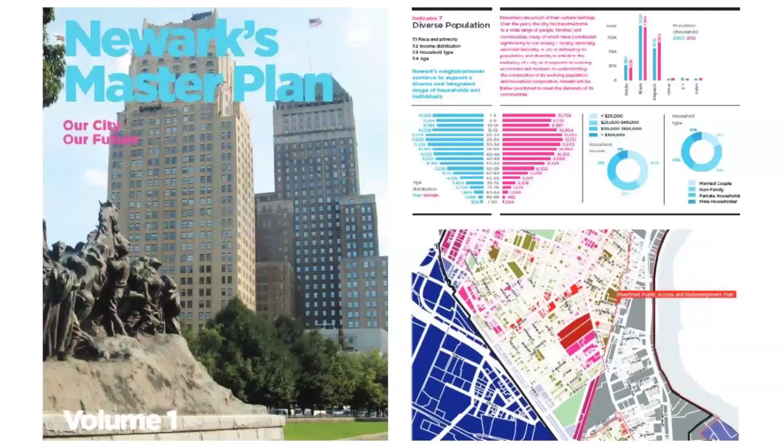So I met my wife in Saratoga. She ended up moving down to the city, my girlfriend, and I followed her there. I went back to get my master's, focusing on sustainability, specifically architecture and urban design. We worked with the city of Newark - this was one of the projects we worked on in our architecture studio. This is 2011, 2012, I was really focused. I wanted to make a contribution, take a meaningful look at things - I have an urban planning background, I like urban design.

And what occurred while I was at grad school was something I think everyone here is familiar with: Hurricane Irene hit the city of Hoboken, where I was living. We had 6 inches of rainfall - it was catastrophic. Then the next year was Superstorm Sandy, which was a different type of storm event. Storm surge is different than rainfall, and that recalibrated the entire community's understanding of what we were up against.

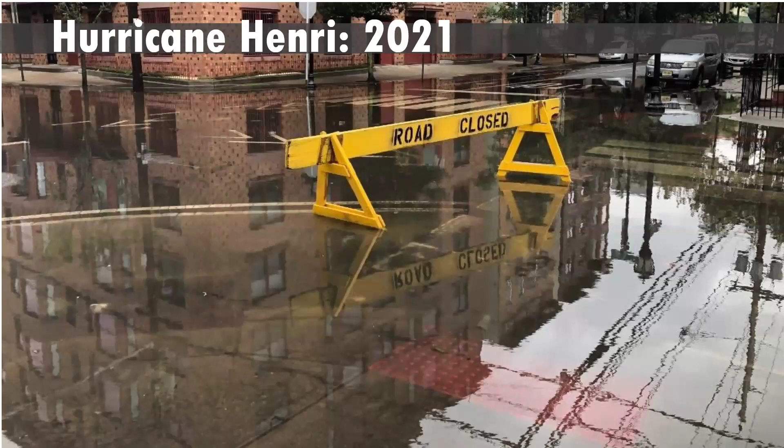I know that there was a lot of flooding in Vermont last year, and a lot of impacted communities. So from 2011 to 2023, we're going from constant flooding, severe flooding, hundreds of millions of dollars in damage, thousands of businesses and residents impacted, to basically flooding limited to a single tide cycle duration.

So the statistic that I want to leave you with is our projects will be done in 2027. Right now, we can address 90% of rainfall events through the practices we're going to go through. By 2027, we'll be able to address 90% of coastal flood risk in the community just through the interventions and policies we've developed.

I thought it was really important—this has got to be slide 16 or 17 here—to actually put this in the context of Vermont and some of the difficult conversations that we went through.

The point of this slide is it's a calibrated question. We do not all share the same sense of reality, as much as I'd like to think that we do. There are differences of political opinion, you name it.

And so the question is: is the risk real? This is a conversation we had with our community. We use facts and data to kind of investigate that issue. So this is a list of disaster declarations from 2011 to 2021, and the federal assistance that the state of Vermont received during that same period.

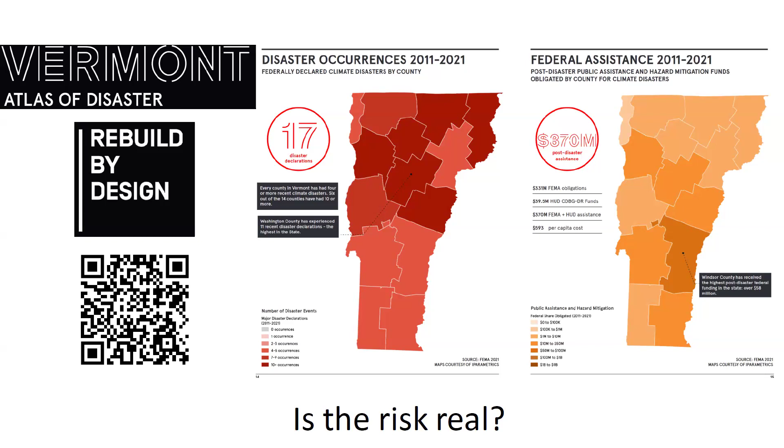I think there are very, very specific questions that we need to ask as it relates to, is the risk real? A study by the University of Vermont predicts $5.29 billion in flood damages along the Winooski River in the next century, affecting over 140,000 Vermonters.

This is from Tropical Storm Irene—like, how long's our memory? Did this happen? These aren't all necessarily questions that get a positive yes. And when we walked through this, like you saw the pictures I started with—did this happen? Do we agree there's flood risk? Those are all kind of things that are complicated. It seems like it might be simple answers, but it's difficult.

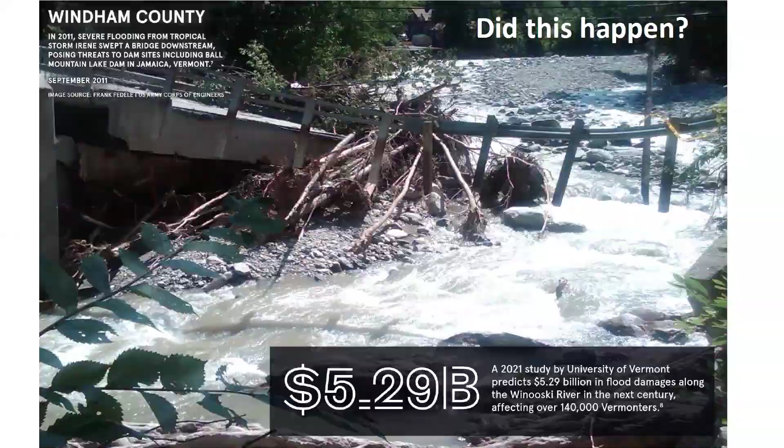I think this question has to do with probability, recurrence, frequency. It has to do with what is your mental model of the likelihood of something severe happening again within the community. And is that such an important question to answer that we should do nothing? So when we spoke to our community, that was a question that came up pretty often, actually, and the answer to that was usually no.

No, we don't want you to do nothing. We think you should do something. And I think that by giving the community the agency to say no, that's kind of direction—though not simple direction. There's always a no-action alternative when you're comparing projects against something. But it gets a little sticky when we answer the question, should we do something? That gets into the who, what, where, when, why, and it gets into site-based solutions.

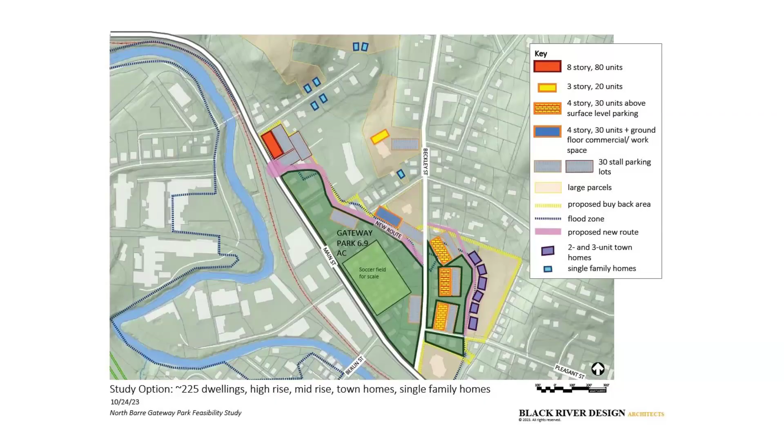At this point in time, this is 2015, there was a petition from the community after we received federal monies, not Hoboken taxpayer dollars, to stop the project. This is a little bit in the weeds, but it said: say no to option A, stop Hoboken from building a wall that doesn't protect all residents.

What this doesn't say is that the reason this petition was started is because we were building on a residential street called Garden Street. And the reason they didn't want us to move forward with the project is because they didn't want us to build in a residential area.

There are only three places you can build flood risk interventions: in the water, on the waterfront, and inland. In the water and on the waterfront were too expensive for our project budget and too impactful. So when we moved inland, that lowered the design elevation and the height, and also meant we had a financeable project, but a small group of people didn't want to see it.

So 742 people signed a petition calling for Mayor Zimmer's job, my job, and the head of our Office of Flood Hazard Risk Reduction Measures—it's our DEP, I think you guys have DEC here. It gets kind of complicated.

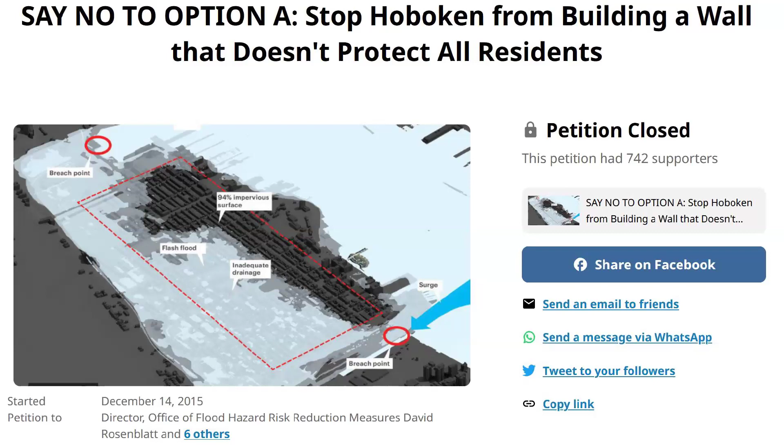So with that in mind, going into the next part of this—we prioritize and execute on a comprehensive plan that includes our capital plan. We worked with our state I-Bank partner to leverage the federal funds we received. But I think it's important that we start from the beginning of where we were, so you can see where we are now.

1868, this is Hoboken. It's this little marshy, wharfy nothing on the west bank of the Hudson River. This is a defining geologic feature, it's the Palisades. Manhattan is obviously across the river, built out. But the pre-existing hydrology of Hoboken was not good. And then they just decided to fill it, and they were like, we'll see if it works out. And it kind of did.

So we have contaminated soils, low built waterfront, like wood piers. I'm not talking about highly designed, heavily engineered. I'm talking about a working waterfront. So over that 100-year span, you have rapid industrialization. From 1955 now to, this is like 2020 or something like that. Let's just call it another 50 years.

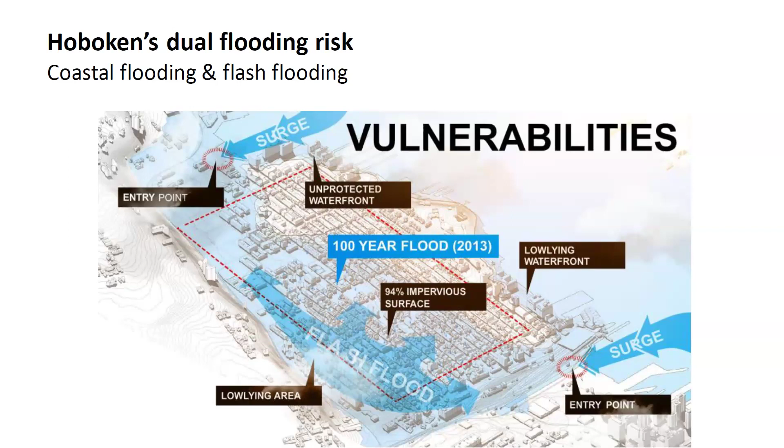There is another area on the west side of the city that's vulnerable to flash flooding from rainfall events. So at a very high level, we began to categorize vulnerabilities and our risk profiles associated with not just hurricanes, but tropical storms, extratropical events, nor'easters. And when you overlay that on our municipal grid, more than 75% of the city of Hoboken is in the coastal floodplain, which is problematic for a number of different reasons, and it generates a whole different risk profile than what may be in the Winooski Valley.

But what we also have is rainfall flooding hotspots on the west side in darker blue. And those 2 different risk profiles generate a great deal of liability. So I'm not sure if everyone can read, but our tax base is roughly $12 billion. The National Flood Insurance Program insures $2 billion. The floodplain is about 3/4 of the city, so let's call it $8 billion of ratables, which means there's a delta of $6 billion from exposure risk versus the actual protection.

So we pay $8 million a year. So that's money just going out of our pocket to the federal government for nothing other than insurance. But insurance caps at $250,000, and a lot of these properties are worth 4, 5, 6 times that. And so you have a big delta now, and then when they issue new flood maps and the risk rating changes in FEMA, we're going to have an escalation that we think annually is going to be somewhere between $500,000 and $1.5 million. But we already know that the first escalation for the new policies is going to be up $1.3 million just in our risk profile.

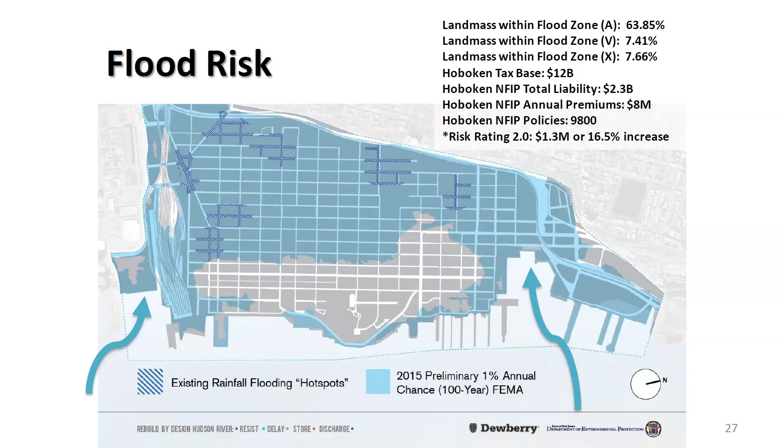So why is this important? We're starting to create a financial case for investing in infrastructure that reduces risk and prevents hardship versus paying for insurance that doesn't modify risk and doesn't necessarily address future development or the health of the community. And so we developed a comprehensive water management plan.

Rebuild by Design was the group that produced those Vermont slides. There's a QR code in there. They produced something called an Atlas of Disaster. They do it for every single state. The statistic that stuck out for me is that Vermont had the 5th most disaster declarations, I think it was last year, behind Florida, California, New York, and New Jersey, or something like that.

So if you look at population versus geography, I think that the state of Vermont needs to think critically about disaster recovery, and the cities themselves need to start thinking, similar to what we had to do, what does the future look like for the next 10 or 20 years? And for us, it was both financing and a capital plan that built out these strategies.

Resist being physical flood walls and interventions that prevent storm surge from entering the community. Delay, store, discharge. Delay being keeping water out of our stormwater management systems. Store, building underground systems that connect to our wastewater management and our stormwater management features, and then discharge being active pumping. So when you have high intensity, high volume, you're using pumps to move water within the watershed away from vulnerable areas.

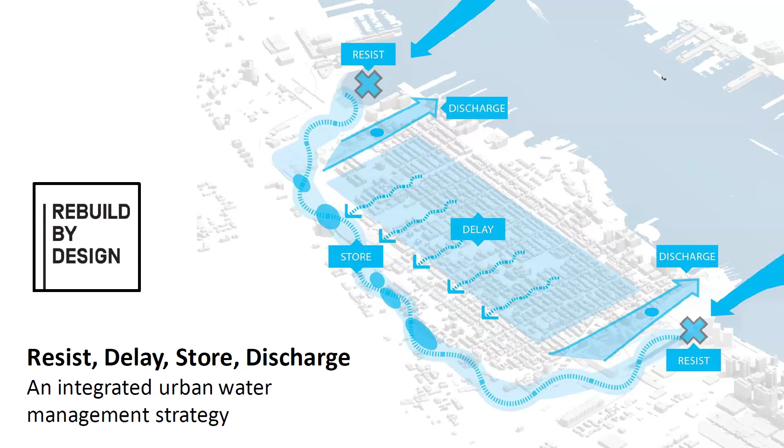I was talking to Michael on the way here. There's a difference between capital planning and what you're looking at, which is part of our documentation for compliance with NEPA, the National Environmental Policy Act. But it basically says in the eyes of the federal government, this project has met historic, environmental, cultural, and offsite impact reviews. It was a 2-year planning process. It cost like $8 million to do. And we were able to put into practice where those sites were, what we needed to do.

So the red area, south side of the city, that's storm sewer modification. That's heavy construction. Same at the north end, so that if water comes up over the edge, it can drain back to the Hudson River. On the west side, the 3 purple areas and lines are where we're completely rebuilding our stormwater management system and redirecting it towards park sites with pumps.

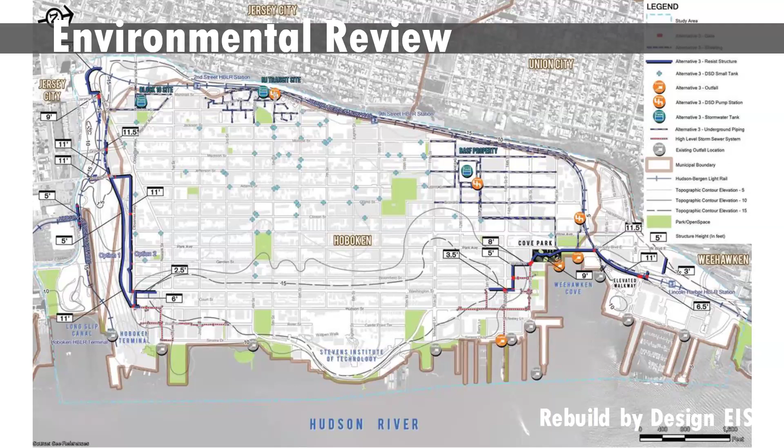By having an environmental review as well as hydraulic risk analysis, we were able to back into a benefit cost analysis that said for every $1 that we're spending, we're reducing risk by $4. So if you start thinking about the expenses that we've had versus the exposure to risk that we have, we're making a financial calculation to the federal government, to the state actors that says, not only does this make sense, it's the best return on your investment you can do in investing in infrastructure.

When we set out to redesign basically the community, we knew that we could not do it through single purpose and single utility infrastructure. If we spent hundreds of millions of dollars on catch basins and pipes and concrete curbs and all kinds of systems that have been proven but don't produce any blue sky value, we would have failed at our job. We were very, very cognizant that form had to meet function.

And the elegant solution is something that you don't necessarily know. That when you're standing on a Resiliency Park and you're playing soccer with your kids, you have a $30 million, 1 million gallon storage tank below your feet. And so we were very cognizant of what that might look like for the community. And these are just examples. We called it a toolkit. We called it an amenity toolkit.

I'll say this now before I show you the next slide: the community was very concerned that we were building walls, that we were gonna separate them from neighborhoods. And the feedback that we got that was very specific was, do not build in front of us, do not build behind me, do not build next to me, do not build in my neighborhood, but don't leave us out from protection.

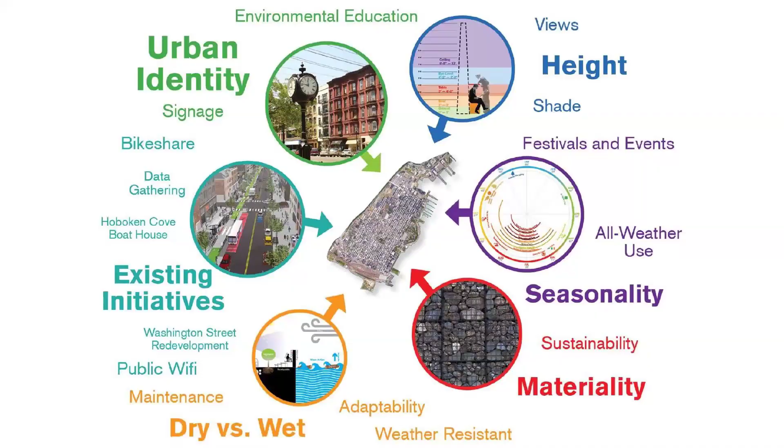So what that produced for us is park spaces that are elevated above grade. Harborside Park's about 4 acres. It's under construction right now, so I don't have great pretty pictures of it. But in the middle of this, there is a 12-foot high T-wall that has concrete footers, bulkhead down to bedrock, sheet piling. It's a seriously engineered feature. But the way it presents itself to the community is through open space and access to the waterfront.

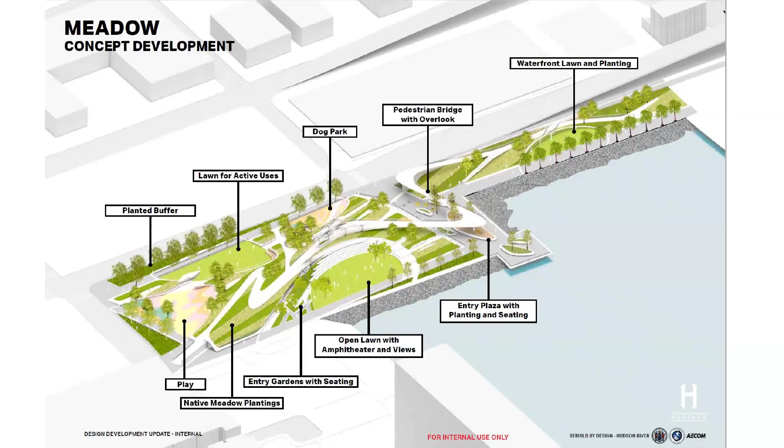In the area right here, there's a gate that comes across, as well as down here, there's a gate that goes across the street. And so by pushing the alignment back a little further from the waterway, we preserved access. We preserved view sheds, which were very, very important to the community, but we were also able to reduce the alignment height. So if you're on the waterfront, you're building at 20 feet above grade, 25 feet above grade. If you move it back, we're at like 12 feet above grade. And that was all confirmed from a hydraulic model that we did to look up and downstream from our community.

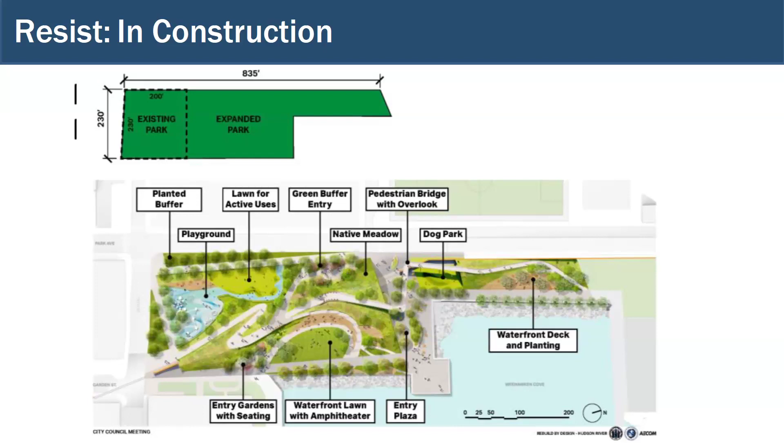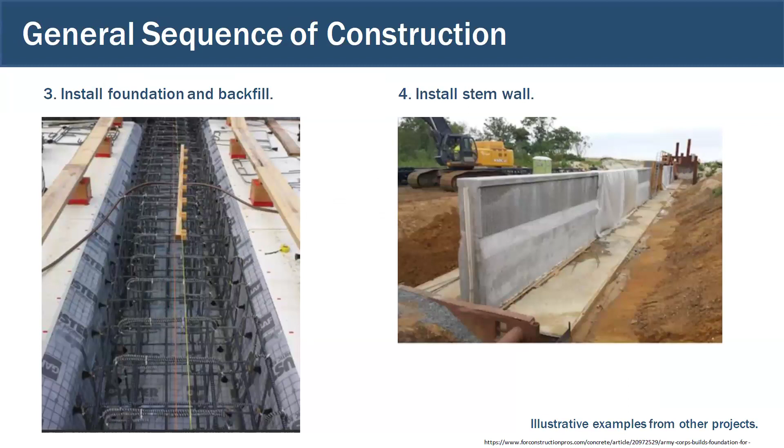So this is kind of what in process looks like. Under that park space, you've got a concrete footer, concrete wall, but then we produce an amenity treatment. I get some criticism for this, people are shitting on the orange color. I like it. It's safety orange. It's the color of the Netherlands. It's the state flag from New Jersey. No one can agree on color. So if that's where we're at, okay, we'll change the color.

But the idea is you can use metal, you can use wood, you can use texture. There's planting. These rolling gates are going to cross streets if there's a coastal storm surge event, but the majority of the time it's just there. And this is more of an active program. You can have passive features that work just because they're there. So what I'm trying to give you an idea of is if the community wants to adapt to flood risk, there are ways to do so without necessarily changing the character of the community, which was really important. I think that I went too far on this one. I've got a lot of feedback, but the idea is that you can make it something that looks beautiful.

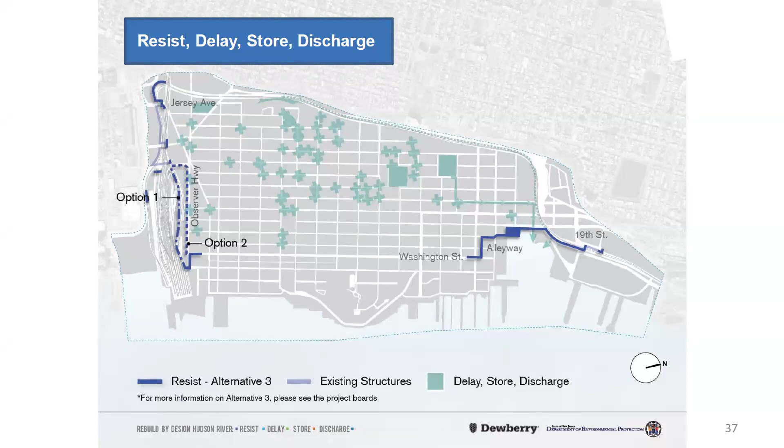So I didn't focus heavily on the wall building piece of this because that's more related to coastal storm surge risk. And I think that we're here to talk about rainfall flood risk and what that means. And I think about it in the Winooski Valley just because that's what I'm familiar with, but flood risk profiles for riverine communities. And that's our delay, store, discharge project. So while the seawall stuff was in planning, I was busy building. And so what we're going to see here is some examples of projects that we've undertaken that have gotten us to that 90% reduction level. I think that's why Mike asked me to come speak.

We had an article in the New York Times, and the New York Times architecture critic calls you to discuss what you've been building, and I thought it would be pretty bad. And he's like, no, it's good. I'm pumped. Come to Columbia, talk to us about what you're doing.

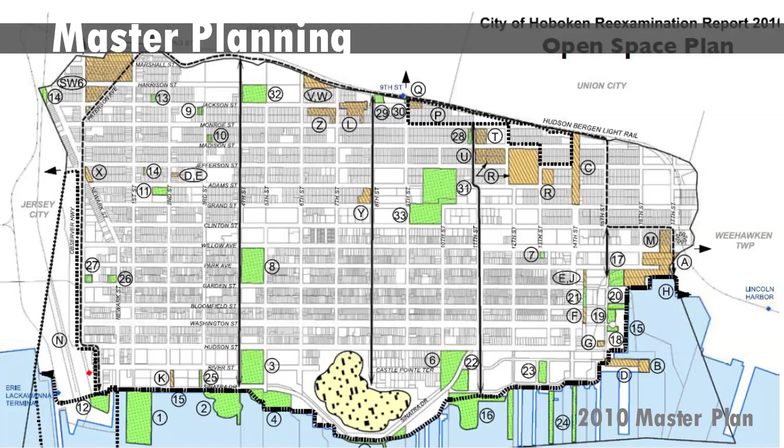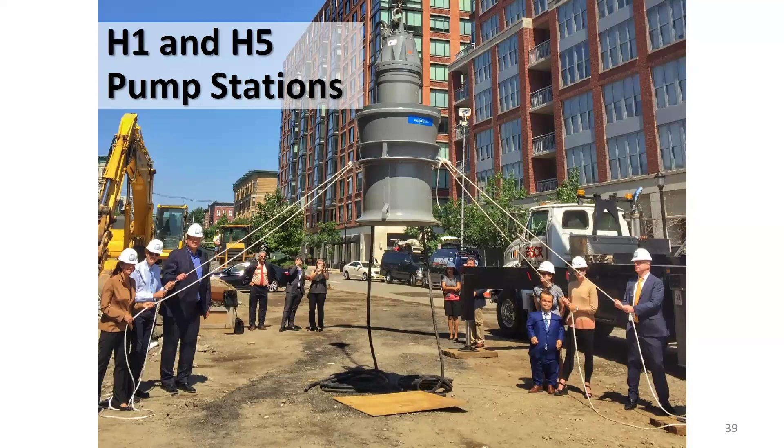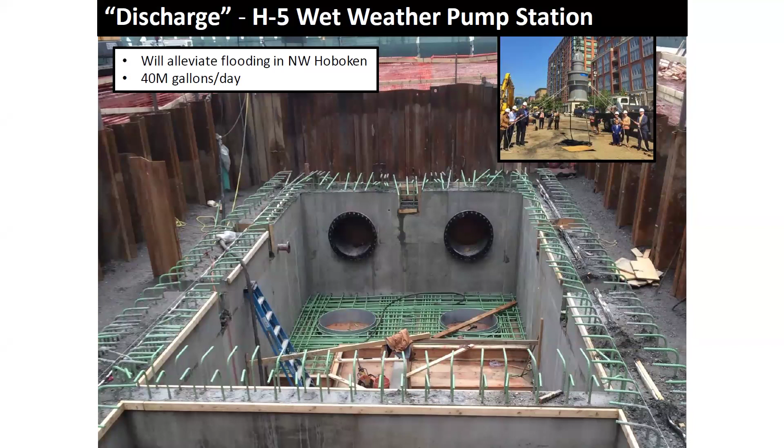So we started by building our pump stations. This is our H5 pump station. It can pump 40 million gallons per day of flooding, so when you start to get into those 3, 4, 5-inch rainfall events, it's very, very effective. This I would consider more traditional gray infrastructure. These pumps connect to outfalls, but they are absolutely necessary to our discharge strategy.

We were able to hire a local architect for the second pump station. When we put the generator above our H1 pump station, we put a copper facade on it to make sure there was some connection to the community. It's actually at the end of one of our major commercial streets, and there's also something above grade that the community can see, that's protecting an entire neighborhood from flooding. It kicks on like 50 times a year, so we wanted people to think about what's going on there.

We have like 3,000 people per hour during peak hour, rush hour, that walk by City Hall. Hoboken's like 60,000 people, and we have 60 to 70% commute via mass transit. So you have low impact, kind of not low impact - it was a full city block we did. So medium impact, low cost: less than $500,000 for us to do this.

It was the framework that was from the last presentation - kind of like low cost, high impact. I forget I'm picturing that, that's why I'm presenting my stuff, not theirs. But the matrix was good - if you remember it, it was like do the bottom left and then go to the bottom right, and then go to the top right, and never do the top left. That was the takeaway. So the community's like, yeah, do more of this. That was good, we like green infrastructure, we want to see you respond.

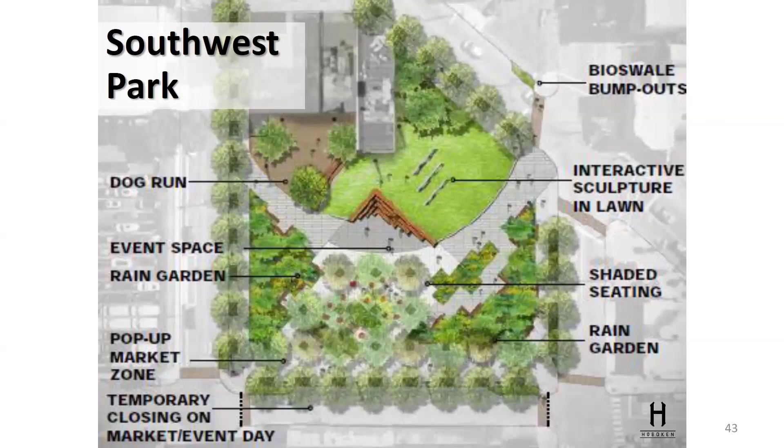So we purchased an acre of property in Southwest Hoboken. The idea was surface park, subsurface storage, access for the community. Below ground, that looks like diverting water from roadways to the subsurface retention areas, making it so we don't have flooding on our roads during heavy rain events. This is what it looks like now - just an urban park that's very well utilized. The stone treatment, those are permeable pavers too, so it's using texture and material so it's not an asphalt parking lot, not just draining off the site to another roadway.

I'd be remiss if I didn't talk about how we put together our financing for these projects. Some come from grants to seed ideas, like the National Fish and Wildlife Foundation - there's a number of different grants at the federal level that come out. We can start to do design, start concept development; we used that for this project. We have an infrastructure bank in the state that funds design. If you're going to do an acquisition or project development, they'll give seed money to help design. Typically our finance cost for that, we're financing like 80 cents on the dollar, so there's always some kind of debt forgiveness portion of it.

The city, like the residents, went out to referendum. We asked, do you want to implement a 2-cent tax for open space development and preservation, exclusively outside of my budget, not in the municipal budget? It can only be used for acquiring open space. About 75% of people said yes, this is pretty good, we should do this. We went back 3 years ago and added another cent as a referendum again, and overwhelmingly more than 70% of people voted for it.

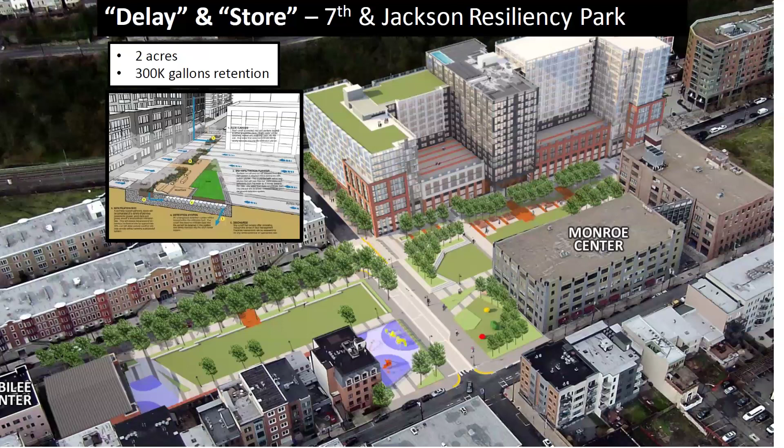This was actually done through a redevelopment agreement. This is a 2-acre resiliency park. Southwest Park has 200,000 gallons of subsurface storage. 7th and Jackson has 300,000 gallons. Put that in context, an Olympic swimming pool is 500,000 gallons, so it's a big volume of water to keep off the streets. Our two pumps combined do 90 million gallons of capacity. These projects help cut the curve off and keep water off the street, but they support the pumps during heavy precipitation events to be able to keep up. They do a portion of what the pumps do.

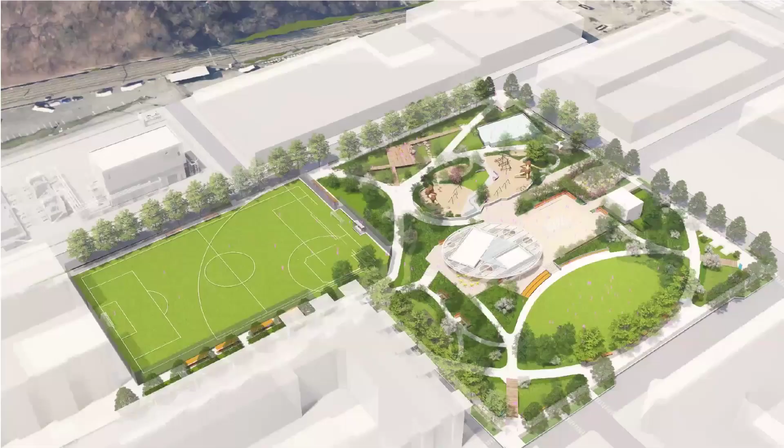This is an example of what it looks like now: green space, lawn, but it's performing the benefits of flood risk reduction. What's not in this picture is that a bunch of businesses started up, because if you have a daycare and there's open space next to your business, you can use that space for your outdoor play area. So we're starting to see it seed economic development in other areas of the city that we didn't anticipate. The community said those were good, keep doing more, we like to see what you're producing.

This is an $80 million project. We purchased the property for $30 million. It was an asphalt parking lot that had to be remediated. We abandoned the right of way between, I think, Jefferson and Madison, so we could build the soccer field.

The coolest project I ever worked on that I'm not talking about today is this building right here. We did a consolidation elevation of a substation. There were two substations in the floodplain. We brought them both together, elevated them, brought in medium voltage power, and we haven't had a power outage since 2019. That becomes important when you're talking about whether you can limit the duration, the impact, the extent of an outage. When your business shuts down for 24 hours because you don't have power, you have to throw out your inventory, and that's bad. So all the flood risk stuff is good, but doing the substation project, we did that through a redevelopment agreement. It was bringing the utility together with the municipality. We gave them land, and it just worked. It took about 6 years. We had to write a letter to the ratepayer advocate to make them do this, but we got that project done.

Back to this project, something the community supported and financed. Again, it's surface green infrastructure with subsurface storage, and this is also the site of our third pump station, H6. It's a pivot in our tactics because we realized that separating the road and bringing water on site to the park, bringing that water under the park, is good, but you need active pumping to manage where water is going. Here specifically, that has a lot to do with velocity, scouring, and overtopping banks. There are different interventions for different purposes, but this project is going to be successful because you're managing water from the site below ground, managing water off-site below ground, and then allowing it to move elsewhere in the watershed very quickly through the force main we're building.

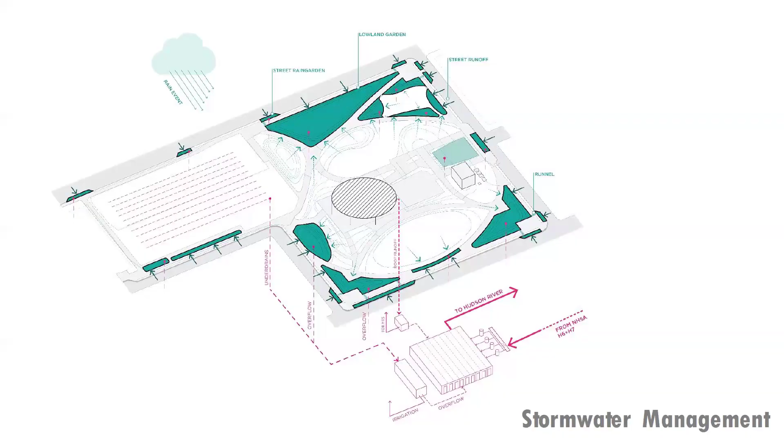They were talking about procurement a little bit with domestic buy requirements. So we had a little snafu on the project. For our contractor, some of that was Portuguese steel, and the EPA said this is the most egregious violation we've seen.

They said sorry, we won't finance that through you guys, we won't do it again. But pay attention, because if you really want to make sure your construction manager or project manager is on point with that kind of stuff, you need to watch closely.

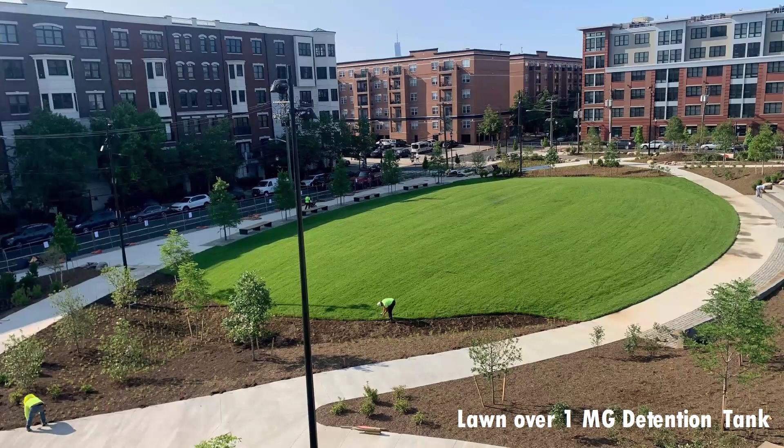But yeah, go play soccer, have a beer. It's under a park space that's durable during blue sky and durable during black sky storm events.

What that looks like for us is actually a little bit different practice. I don't know if you guys have seen high density polyethylene piping—it's basic, you can lay it down anywhere.

We used that as the void space and created another 500,000 gallons of storage underneath the soccer field using high aggregate crushed run gravel and HDPE piping, so water goes there instead of onto our city streets.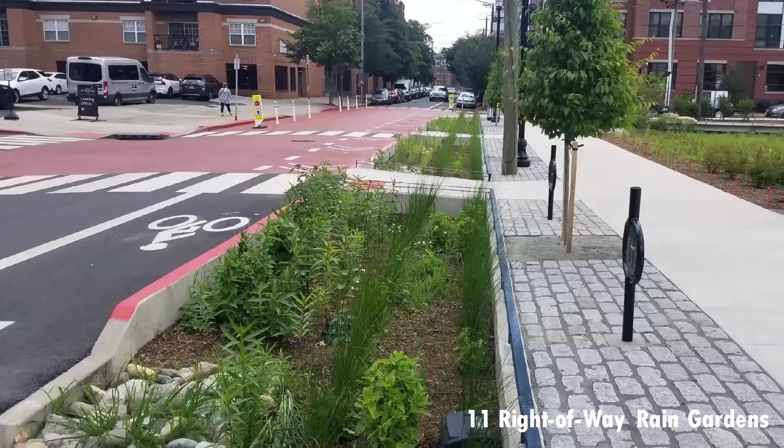Something we're really proud of is our Vision Zero program. These are curb bump outs that have green infrastructure in them, and we've got epoxy treatments on intersections.

Visible crosswalks—this is actually a big thing, these daylighting poles, so people can't park there, so pedestrians can see what's going on and drivers can see pedestrians. Hoboken hasn't had a traffic fatality in 7 years.

This is another example of a transportation issue being also a stormwater issue. Let's build them together—we're bringing different sources of funding into a project and working collaboratively.

This is just an aerial shot. It looks much nicer now, or not right now because we're in mud season like you guys are, but as this matures, and as it has matured, you can start to see the plantings establish themselves.

This is our third pump station, H6 right here, where we built it with the sewage authority. We actually gave our sewage authority that site—we said go ahead and build it.

That screwed our contractor, we're behind by about 6 months, can't do anything about it now. I'm not going to go after them for liquidated damages, but if you're doing joint projects like that, it can happen.

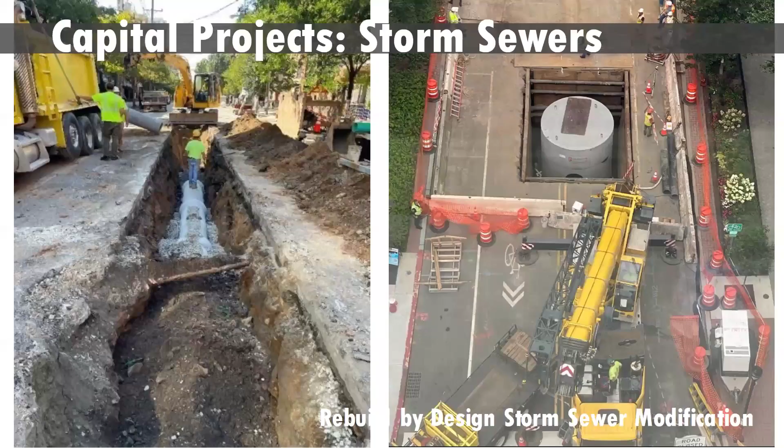We continue to expand those policies. So we have all those green hatches you saw from our original plan—we're doing curb extension bump outs and rain gardens on our roads. This is part of our capital program to separate the storm sewer.

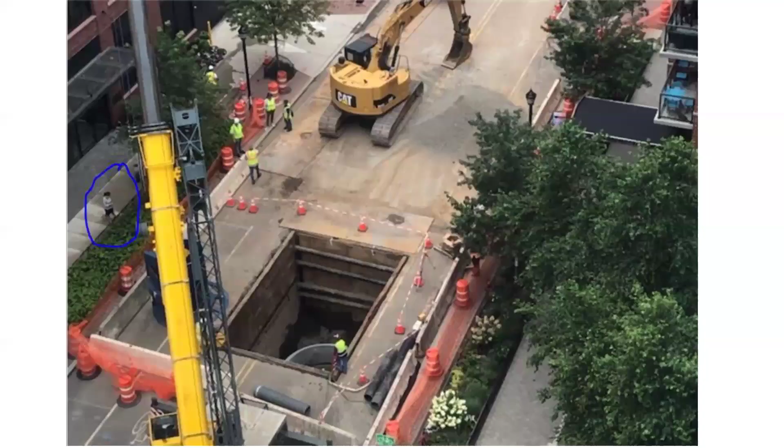So we're making sure that we have water-specific areas to go—this is water quality treatment, and the pipes are a little oversized for water quantity conveyance. This is the little blue circle on the left.

That's cool, there's a big hole there. I don't think anyone's really interested. That's our second ward councilwoman.

She was on site every single day, monitoring the project and sending me pictures—it was like the best construction manager I've ever had, but she was excited about the project and happy to see us be successful.

Since Sandy, we've done like 1 million square feet of green roofs, trying to capture water before it goes into the system, raising albedo in the community, and reducing the urban heat island effect.

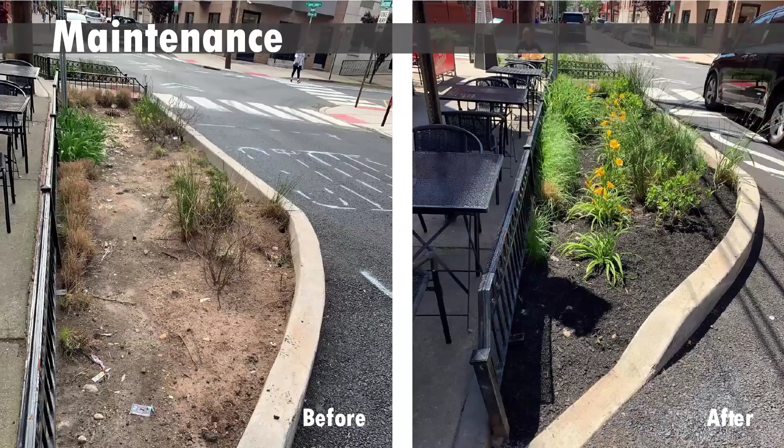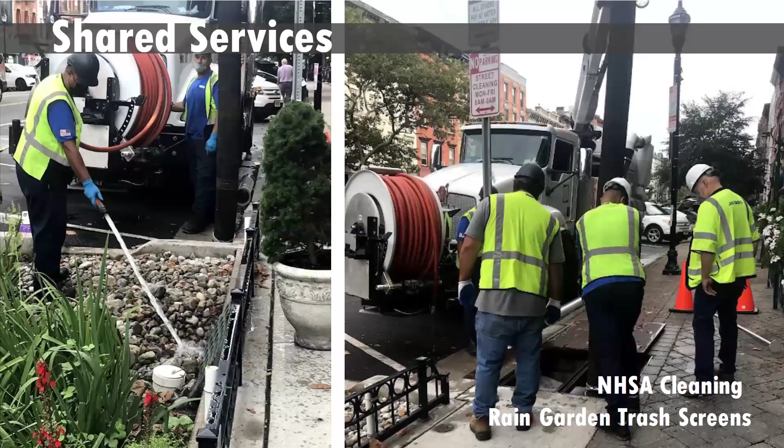And we've had to pivot on our maintenance strategies because someone's got to maintain it. We didn't do a great job to start, so now we have training, staff that does it, contractors, and shared services.

These are North Hudson guys cleaning out some of the rain gardens. One of the things they'll do for us is go subsurface if we have cisterns or storage anywhere, and they'll clean those things out for us.

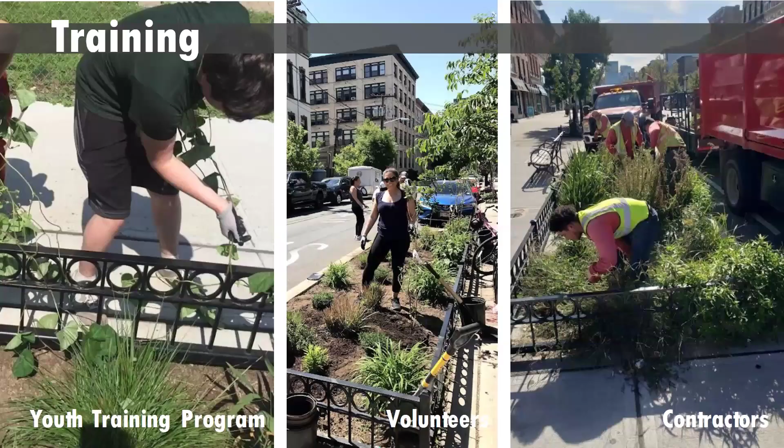We have a youth training program, a volunteer Earth Day kind of thing, getting people out to help us weed and make sure the plantings are in good shape. We also use contractors, and some of this stuff is expensive to maintain — there's no way around having that conversation.

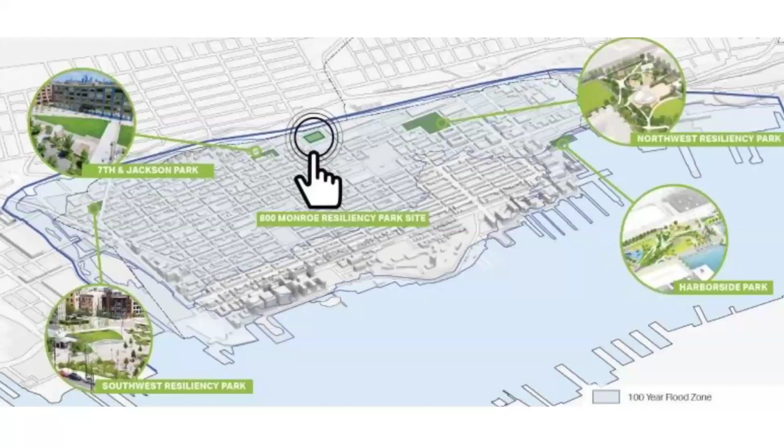What I think is interesting is what we've done with our I-Bank — we've started something called capitalizing establishment costs. It just means the contractor pays to maintain it for 2 years. They plant something and take care of it, so you don't have to go out and replace trees if they die or if the plants are dying. It's a unique way of packaging the finance, but we've found it to be pretty effective and eligible for state financing. This is an example of a direction we're heading in.

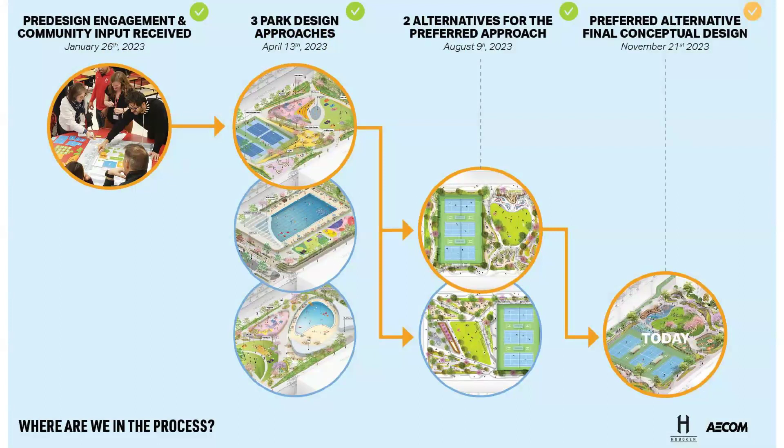What we do with our designers is build out physical models that we bring out and put in the neighborhoods that are going to be constructing these practices. This is that same kind of surface, subsurface setup. We're going to be putting a pump there.

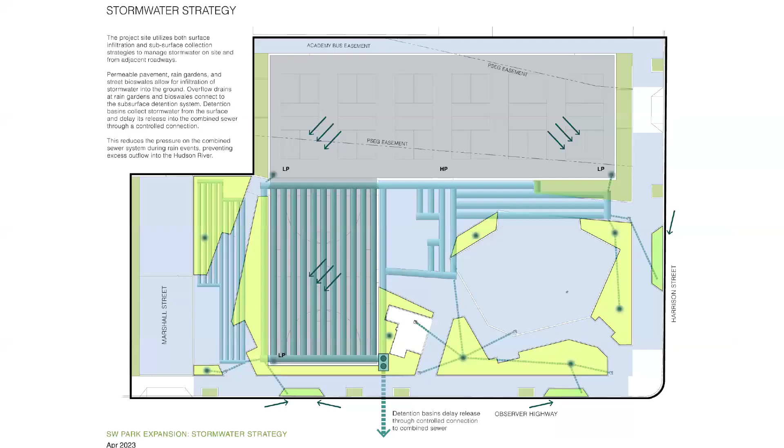This connects to 7th and Jackson Resiliency Park. This is the existing Block 12 Southwest Park — we're buying the acre next to it to put pickleball courts where there's currently an asphalt parking lot. We're designing underneath it for stormwater management again, and then ultimately presenting that back to the community.

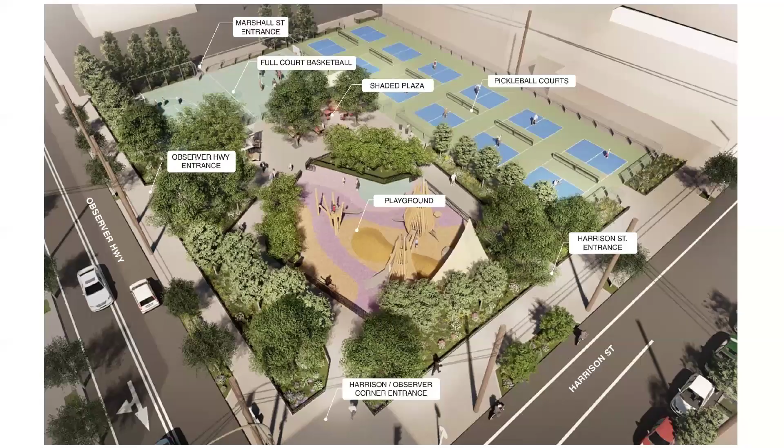The reason I want to go into a little case study with this project is that it's interesting — we had 5 different sources of funding for it. And I think we're at a point right now where zero of them were municipal bonds.

So Open Space Trust Fund being a big one, iBank Principal Forgiveness being a big one, Green Acres — similar, a state-funded project to support open space development and green infrastructure. The reason I show this pie is that you may have goals you're not sure how to finance, but sometimes it's good to have a vision and back into how to finance these projects. We received about $6 million on a $12 million project from FEMA for the development of this project.

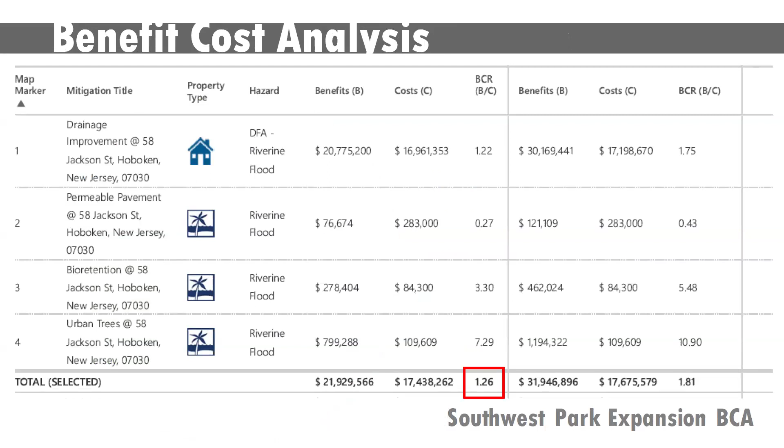Just to harp on benefit-cost analysis — is every dollar we're spending reducing risk by a dollar? Yes. It's a bunch of jargony stuff, but I just like seeing the 1+ at the bottom.

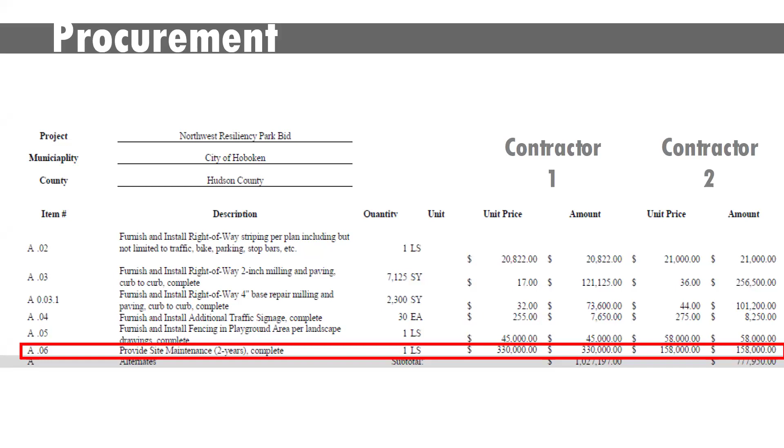That's important. This is what I just talked about — providing site maintenance for 2 years complete. That means your guys aren't having to do it, you're not having to hire a different contractor — it's the person who built it, likely the contractor, and they're not able to subcontract the stuff out.

I think this last summer you guys had something crazy like 6 or 12 inches of rain over a 1-day period. I can't manage this — that's past, that's avoid, evacuate, that's taking protective measures and making sure you're not putting your material or people in harm's way.

This is really tough. This is where you're like, we need to avoid impacts in this area. And that's a difficult conversation.

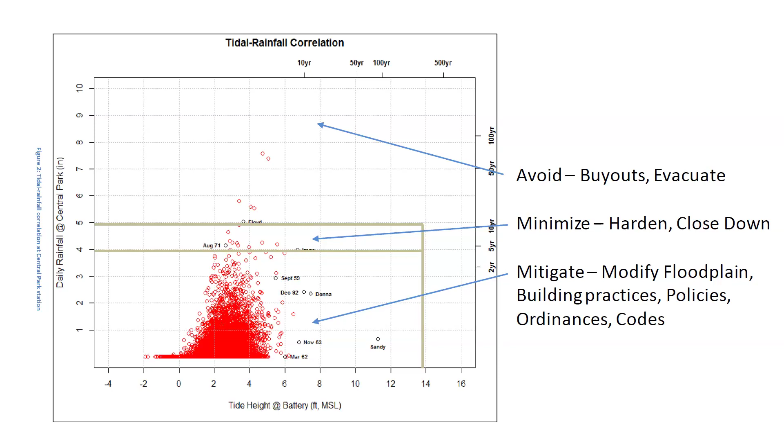So I'll go back to the 4-part water management strategy. You saw a lot of different examples of how we're doing that. We're adjusting risk, 90% of rainfall, 90% of storm surge.

There's kind of a point where it is overwhelming to think about where to start or where to begin. And so what I like to say is, Desmond Tutu said, how do you eat an elephant? And the answer is one bite at a time. By my math, at 4 pounds a day, you could eat an elephant in about 8 years.

So by the time our projects are done, we'll have eaten 2 elephants. I guess that's 16 years' time. It's a lot of work, it's a lot of money, but if there are points of either common dissatisfaction or a directive from the community to get started, I suggest everyone get to work.